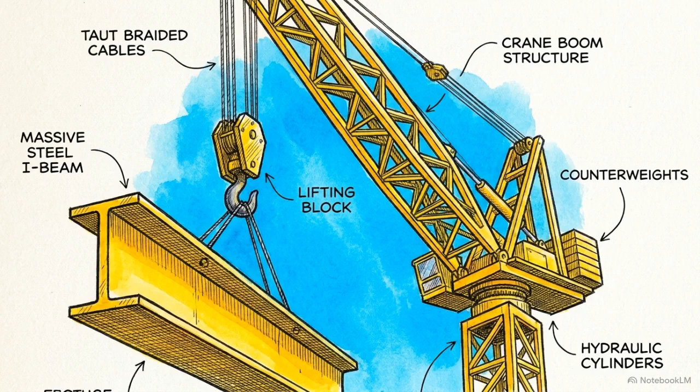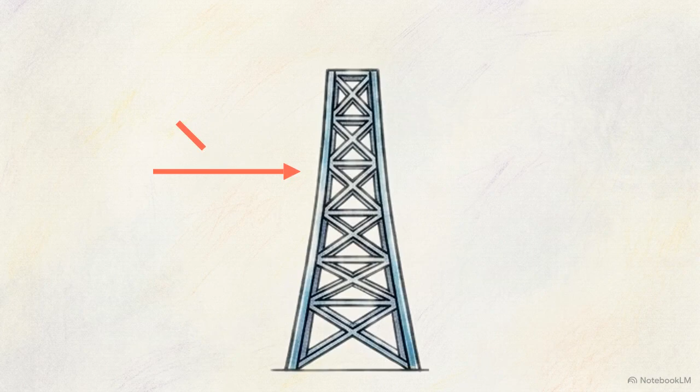When a crane lifts a steel beam, a bridge supports rush hour traffic, or a radio tower resists heavy winds, these structures aren't dealing with a single isolated push or pull. They are reacting to dozens of simultaneous forces working together. We call this a force system.

Before an engineer can calculate whether a structure will hold its ground or collapse under pressure, they have to define the exact geometry of that force system. The first step in analyzing any structure is determining its spatial environment. We do this by looking at the plane.

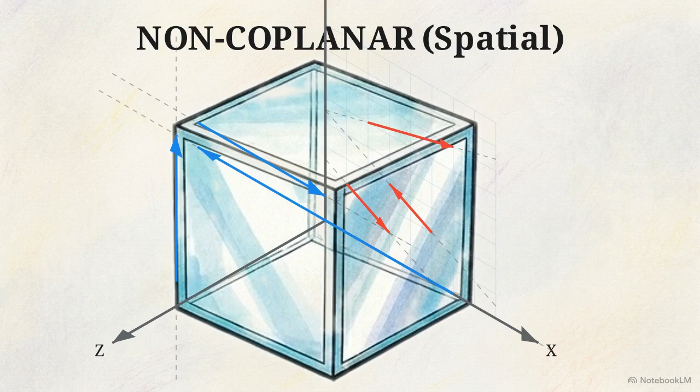Look at this 2D grid. If every line of action lies perfectly flat on this surface, we classify the system as coplanar. But if the system breaks out of that flat surface and operates across 3D planes, it is classified as non-coplanar, or spatial. Establishing whether you are working in a 2D coplanar or 3D spatial environment dictates the entire mathematical approach you will use to solve for equilibrium.

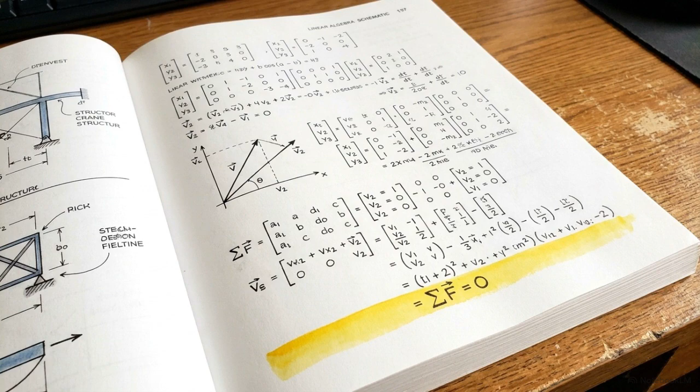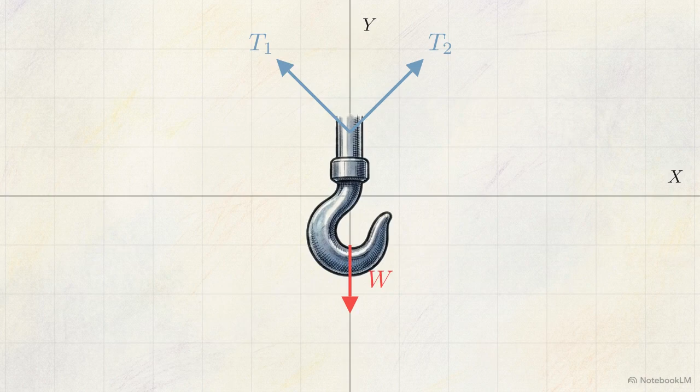Let's start with 2D systems. This schematic shows a crane hook. The weight of the load is pointing straight down, while the tension in the chains pulls upward and outward. All of this happens on one flat plane. If we extend the imaginary lines of action for all three of these vectors, they intersect right here at a single central point. Because they share a plane and share a point, this is a coplanar concurrent system.

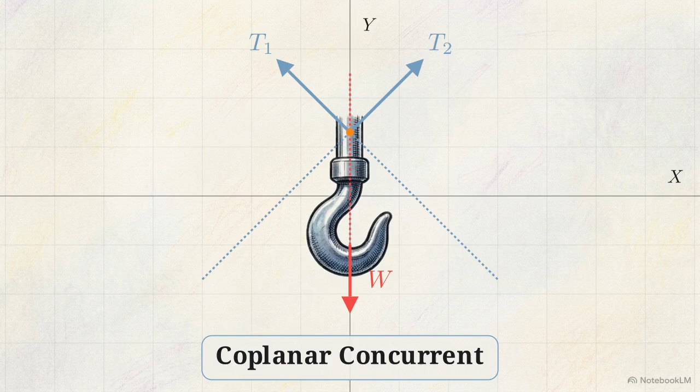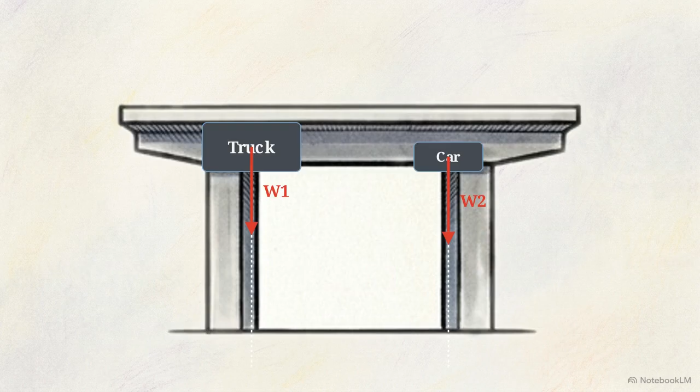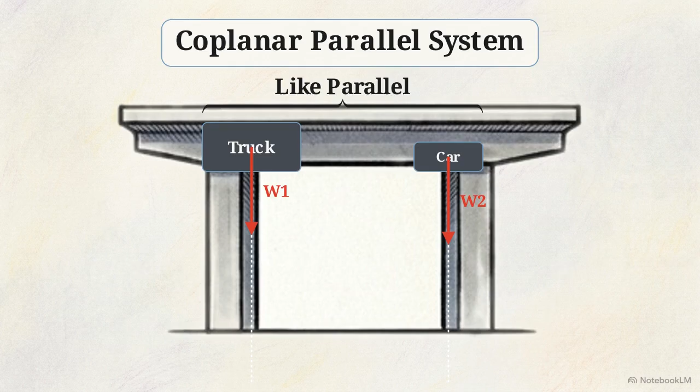Now look at this side view of a bridge. The downward weight of a truck and a car run right alongside each other. If we trace their lines of action, they will never touch. We call this a coplanar parallel system. When forces push in the exact same direction, like the vehicles pushing down, they are like parallel. When the ground supports push back up in the opposite direction, the relationship between the two groups is unlike parallel.

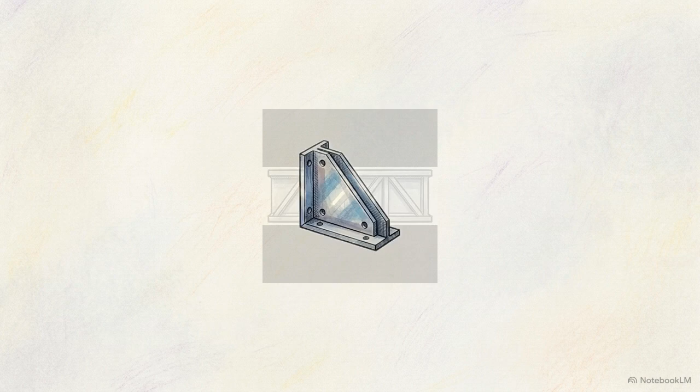There is also a highly specific subcase. Inside a single joint of a machine truss, you'll find forces acting in opposite directions, but lying end-to-end on the exact same line of action. These are collinear forces. In a 2D environment, the rules are strict. Forces must either cross at a point, run parallel to each other, or share the exact same line.

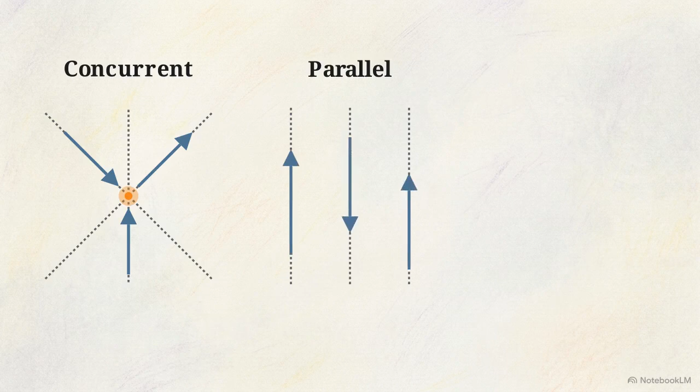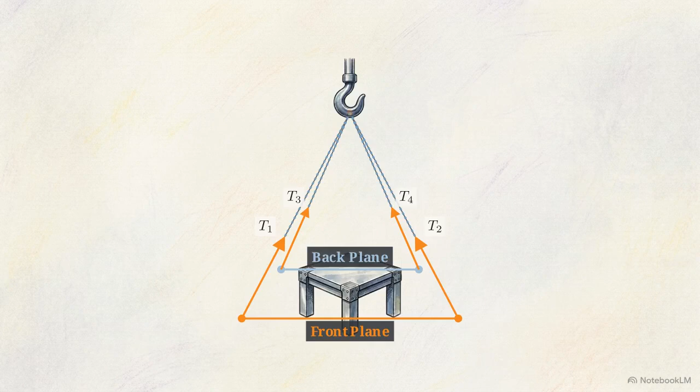The same rules apply when we move into 3D space. Here is a 3D wireframe of a heavy table suspended by 4 cables. These cables occupy completely different depth planes, but their lines of action all converge right here at the ceiling hook. Because they exist in 3D space, but meet at one point, this is a non-coplanar concurrent system.

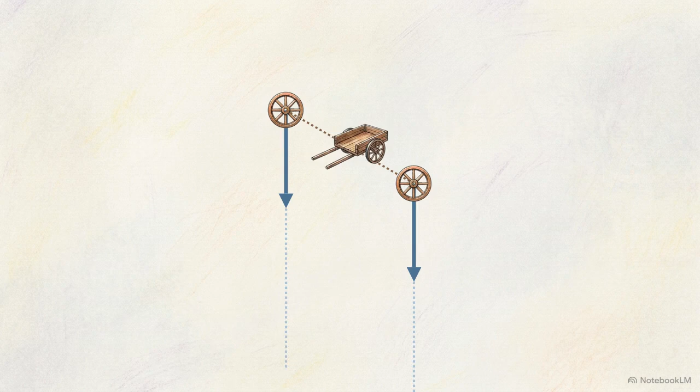Next, consider the downward force of the 2 side wheels on this moving donkey cart. The wheels sit at different depths. Their lines of action project downward and will never intersect because they occupy completely separate planes. This is a non-coplanar parallel system.

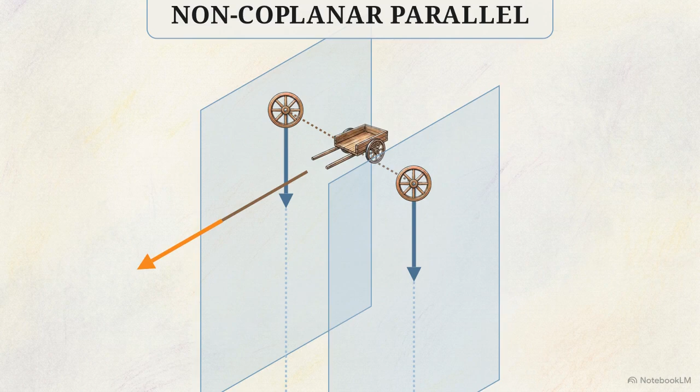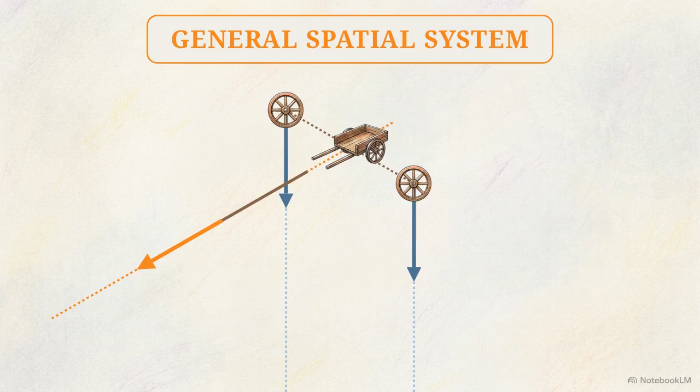But watch what happens if the donkey pulls the cart forward. We've introduced a horizontal force. The system no longer shares a plane. The lines don't meet at a point, and they are no longer parallel. This is a general spatial system. Even in complex 3D environments, you are still just checking for those basic rules. Do the lines intersect, or do they run parallel across multiple axes?

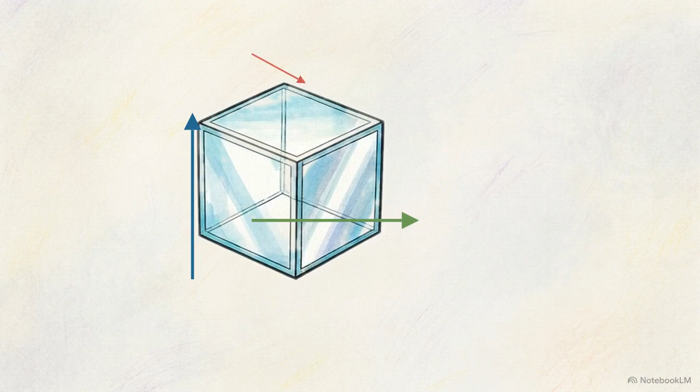Let's test this. Pause the video and look at this cube. We have 3 forces mapped along different edges and faces. Run through the mental checklist. Do these lines share a flat plane? Do they cross at a single point? Do they run parallel to each other? They share no plane, they miss each other completely, and they face different directions. This is a non-coplanar, non-concurrent, non-parallel system.

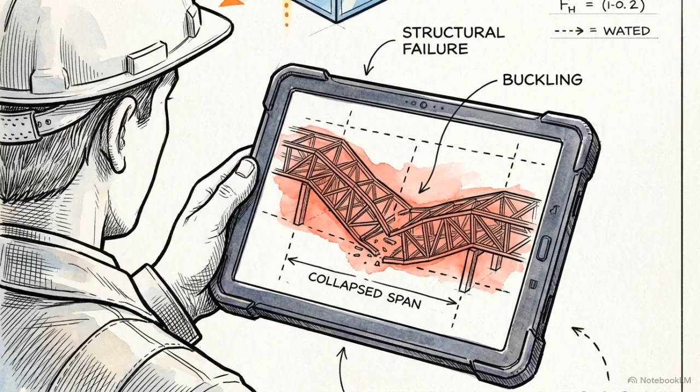Running this exact checklist is how you prevent catastrophic errors before you write down a single equation.

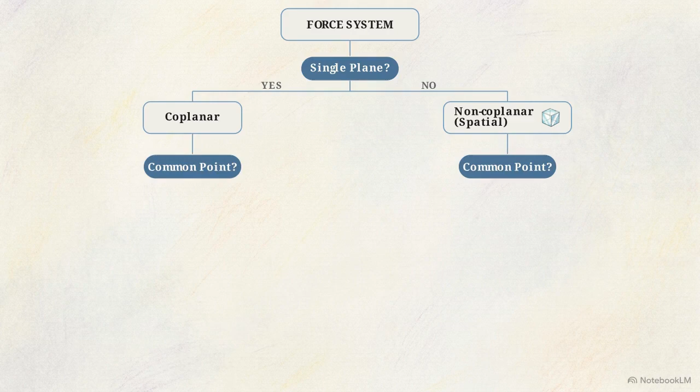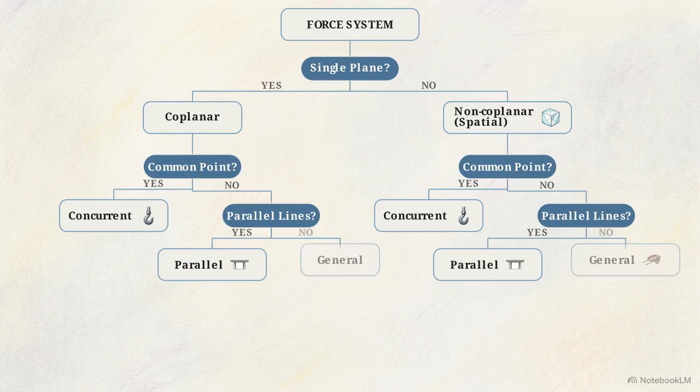To classify any system, use this decision tree. Start at the top. Are all forces on one flat surface? This splits your problem into either coplanar or non-coplanar. Step 2: do their lines of action cross at one point? If yes, the system is concurrent. If they don't cross, move to step 3: do their lines run side by side without touching? This categorizes them as parallel. If they aren't parallel either, you have a general system.

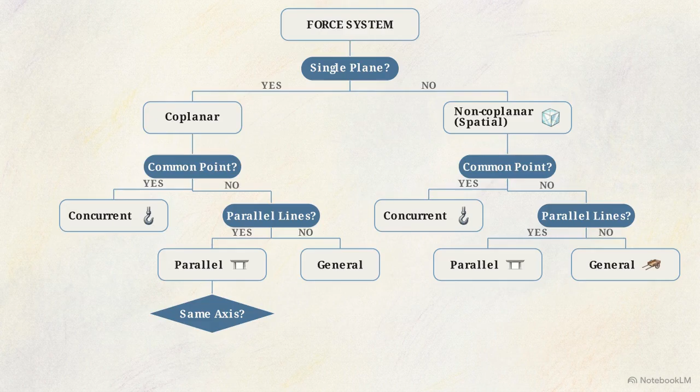And if they are parallel, ask one final question: are they on the exact same line? If yes, they are collinear. Take a screenshot of this tree.

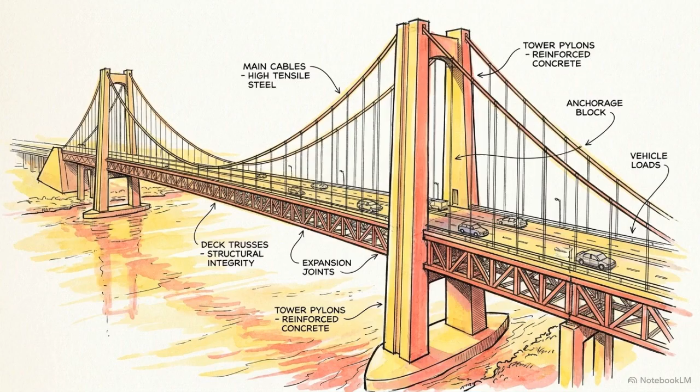Perfectly identifying the force system is the mandatory first step for calculating structural equilibrium. It is how you ensure machines operate safely and structures stay standing.